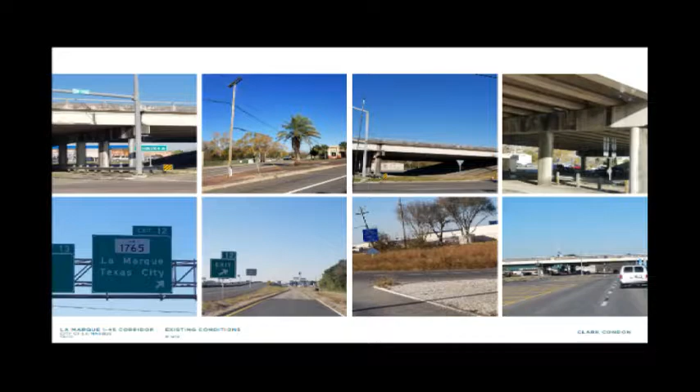Some of the big things you'll see here: the corridors down the middle, a lot of rail, a lot of major thoroughfares that cut through, and then parks all through the community that would be destinations for people. So that's our starting point.

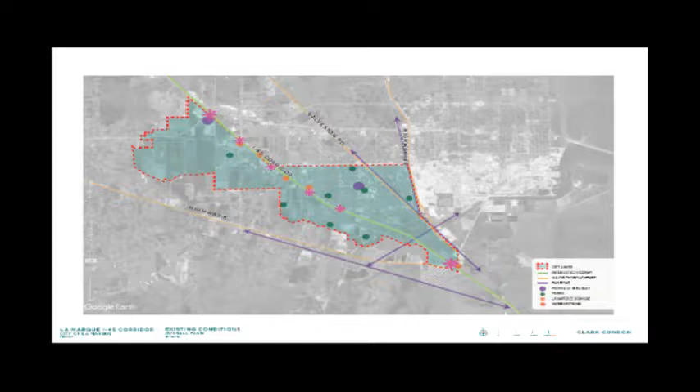But I think one of the big things Colleen and I have been talking about, that we want to really push TxDOT on, is that to the north of this, there's not much coming south on 45. How do we get them before we get into La Marque? They did a pretty good job coming north on 45, but not so much coming south. So hitting them before we get to the city limits is going to be key with the signage itself.

But other than that, they have increased the amount that has La Marque listed on them. Is number 8 and 9 still going to be like that, where it's got Texas City listed first? These are currently what they show on their schematic. They're only at 30%. We have not gotten an updated drawing set from them, so we'll be able to update this when we see that. Right now we're going based on what their schematic says, and this is what it says.

We had discussed before, any place where both cities are listed, putting La Marque first. It's a subliminal suggestion - but it's also alphabetical. That was the reasoning the individual gave that made that suggestion, and if that helps sway it, that would be good. Put us first.

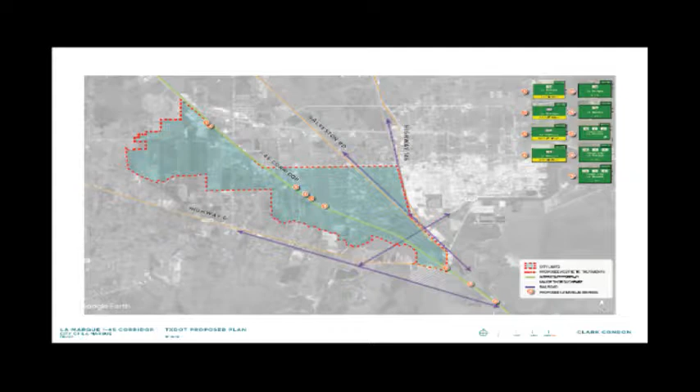So, one thing which you guys have seen it probably all over the place, but as you come down 45,

One thing we wanted to point out was they are improving the corridor. So you're going to go from those first images that we saw, which had no aesthetic to it at all, to what they call their green ribbon standard, or green ribbon corridors throughout the Houston region, and they're broken into 3 different areas.

Everything north, I think, of I-10 is what they call their vertical scheme, which is basically based on the piney woods. So everything's vertical. You see a lot of tree ID and things like that.

Everything to the west is based on the Katy Prairie, so it's a lot of horizontal schemes and horizontal things on the wall.

And then everything south of Beltway 8 especially is what they call their wave scheme. It's all based on the Gulf, it's all based on the water.

You've seen this being applied elsewhere as you go north on 45 already today. So they're applying the blue color to their outside beams, they're applying their wave on the columns and the walls and in the barriers. And then they're actually putting in concrete pavers throughout underneath the overpasses and things like that.

They are redoing a lot of the signals. I know one of the conversations we've had is we want to upgrade them to maybe a painted color or black or something like that, where they're just going to put in the standard gray.

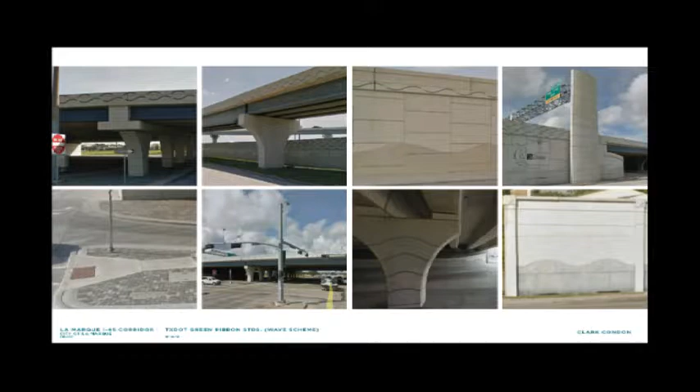So looking at some of the programming for you guys, which is an overlay to what TxDOT's already doing, we pulled some precedent imagery of things that have happened and things we've done, things we have in design currently for different areas. So there's things like doing illuminated street signs off those poles.

So when you pull them up to an intersection, it's pretty self-evident. It's not just a small blade sign. Enhanced planting along the corridors, enhanced signals with paint that are painted black or to go along with the schemes.

Similar here, looking at, you've seen what Webster's done, you can do the similar thing. They're going to be creating some detention ponds, so there's an opportunity there, especially playing off the whole water aspect of it, because we can over-excavate those and have a standing water aspect of it, create a pond with a fountain, so it kind of ties the whole water idea.

Branding and identity, so this is an intersection concept we've done for Texas City that they like and they're possibly going with, and again, it's more of the landscape.

So this is kind of the idea and the gamut of things that you can touch relative to either working with TxDOT or after TxDOT's done with their project.

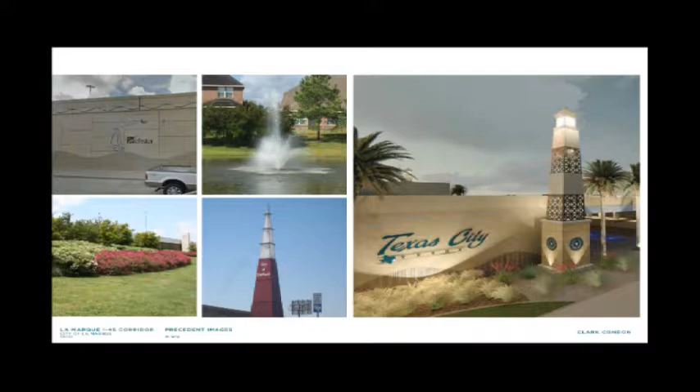So looking at, again, we're back to that same plan, looking at your corridor, one big thing we wanted to take away going for the proposed portion of this is those 6 intersections. We want to hit on those specifically, but then the 3 magenta stars that you see on there are big for what we want to talk about.

Those are probably your 3 big locations where we want to try to do maybe a large identity marker. We're not exactly sure, we don't have designs for that yet. We just have locations right now, but those are probably your first places where you want to grab people and say, hey, this is what we are, this is what we're about. And then we'll go into looking at each one of those intersections now.

So this is the first one at 1765. The trick with the first couple of these is that the city limits for La Marque and Texas City run straight down the middle of the highway, so that doesn't work very well when you're trying to brand an intersection, one side versus the other.

So what we'd think is to take the opportunity here, because Texas City's branding exercise stopped before this. They went to the flyover, trying to draw people into Texas City up there. So this becomes the first opportunity for you guys to make it your own.

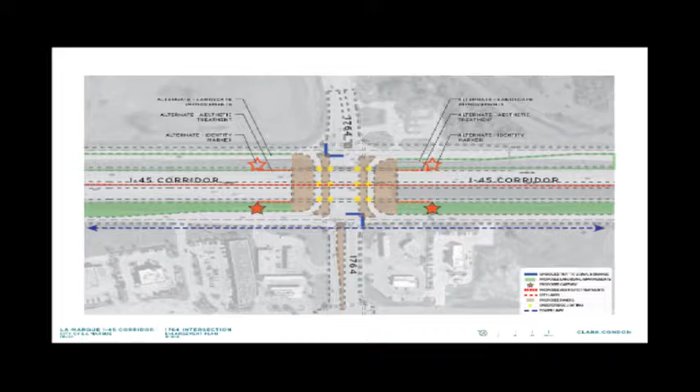The next one, Delany. You'll see this intersection again - we used it as a typical because it had a little bit of everything in it, so we show some enhanced renderings later on. But the key here is all the same stuff. You have the same issue with the city limits running down the middle of the road. Identity is the same, all the things are the same on this intersection, just a little bit different configuration.

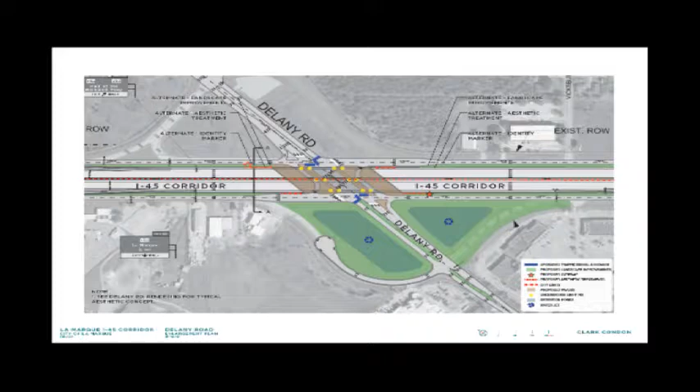But the idea here is the detention ponds - so if we have detention ponds, can we over-excavate those? Can we turn them into amenities for you that draw people in and show that you have enhancements throughout the corridor?

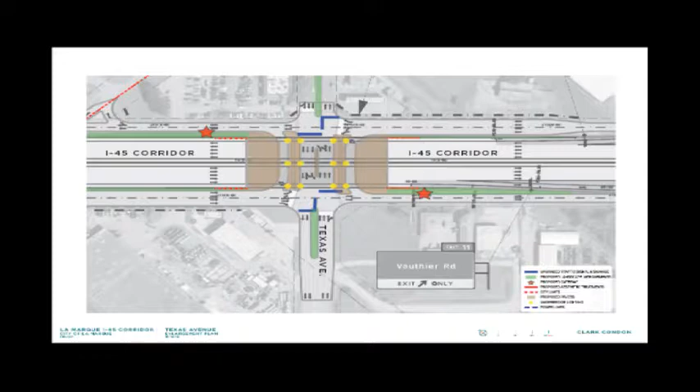Which one's this? Sorry, I'm blind, I need new glasses. I cannot see that far.

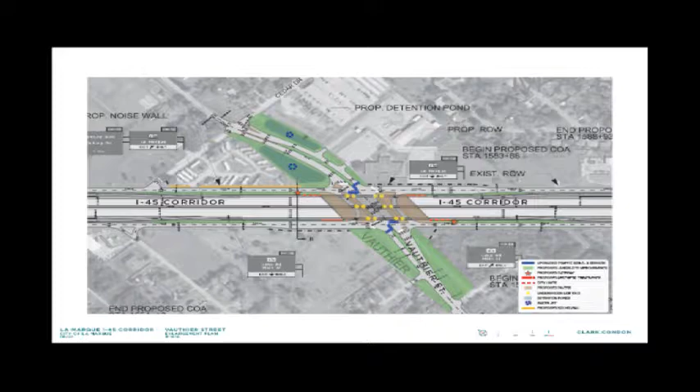This one is similar to Delany in the sense that it has all those same aspects with the detention on it. The key thing you pick up here is there's a portion where they start to have the sound wall - that's the orange line you see on the screen on the left. So when we get further into the details, you'll see how we have some options on how you can treat that as well to brand it and make it an identity feature for you. But everything else, for the most part, is the same aspect, same program, same items.

All right, this one is where Main and Lake come together. This is a very interesting intersection because they're bringing both of them together at the same time. One thing I'm sure you guys are not a fan of - they're using this in lieu of bringing Bayou through the corridor. So Bayou now is going to tee into the freeway, and they push you to Main to this intersection to go underneath.

And I think the reason why that is, if they had another overpass, they can't get up and down with their geometry that they want for the highway. So that's my assumption on this part.

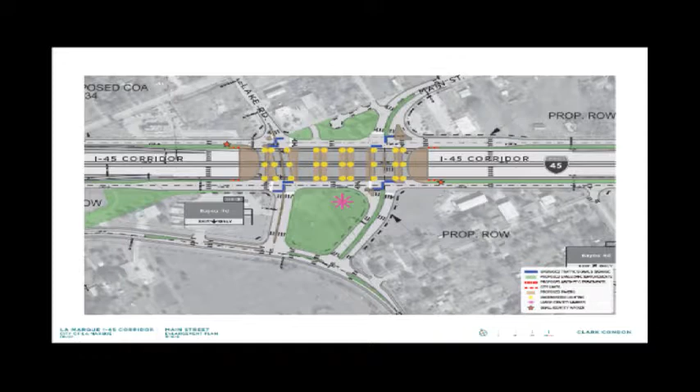But what this does open up for us is a bigger opportunity right in the center of the city to do that. That's what that pink star is, a place for us to do another large identity piece on that large green space right in the center of the city. So this could be one of your key intersections for branding and identity in the middle, especially with all the stuff you're going to have underneath there. It could be a large piece that you're going to remember if you're coming through here.

So we're going to keep zooming in, is pretty much what I would call it. If you think about starting in space at 30,000 feet and then coming in for a landing, this is what we're doing. So on the corridor aesthetics, we're looking at it in more detail.

Like I said, we picked Delany just because it had everything on it. And what you're looking at here is if you enhance those areas, what they could possibly be.

So the detention ponds that they have, we could go in and excavate the bottom of those and have a space where they have standing water and fountains in them. We're doing that in other places. It works.

They're floating fountain features, so they're mobile. They can be maintained pretty easily. I really like that feature.

Back on the ones I was showing you with Texas City talking about doing some, Pearland's doing them. They're doing that a lot, and it doesn't just look like a green divot in the ground. So it makes it a whole lot more of an amenity, especially when you landscape around them as well. Because you get off here and you turn right and it's just two big green holes in the ground. It's not really much of an amenity for you guys.

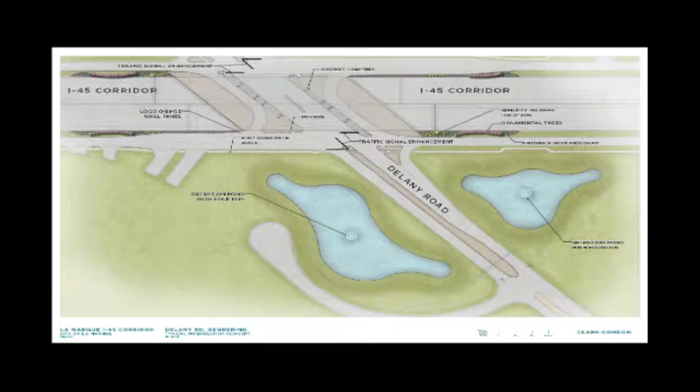You see this all over town, Sugar Land, any of those places. And what we're talking about here, and we'll talk about a little bit what the planting is, but that's where we're talking about more the high-end planting that you would have to be maintaining on a more regular basis.

Big picture-wise, when you start to zoom out, the spaces between intersections, really what we're talking about for you guys, because I know budget can always be an issue, because some of this, when you start doing over and above what TxDOT's already doing, they're going to talk about maintenance agreements, they're going to talk about what you're doing over and above what they're already maintaining.

They're going to maintain it like you see it out there today, so if you want it maintained to a certain level to obviously enhance for your community, you're going to have to take some responsibility, and that's what they're going to require of you guys.

But what we're suggesting is using some of their basic stuff, which is their planting, which you see all over the place, is that mass planting, where they go in and put big swaths of different plant material together. Kind of reforesting is what they really call it.

And what we're talking about between intersections, where we don't have the enhanced planting, is creating pockets on a regular basis so it continues the landscape theme throughout the corridor, but base it on something that's standard for TxDOT, so it'd be less of an issue for them, where we're just going to work with them on what the plant material is in it.

Are there parameters on what kind of plants they will allow?

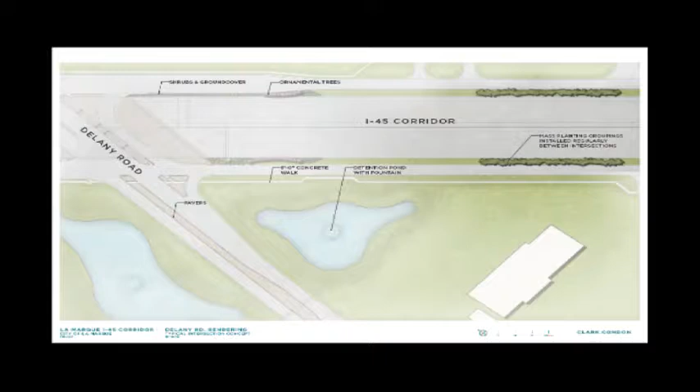There are very few that they won't allow if you're maintaining it. They have their standards that they like to do, but what we would want to do is try to gear this towards the region that you guys are in and something that works for you guys.

As an example, we pulled out one of those enhanced planting areas, and the theme we would want to go with you guys, because I've heard a couple comments about staying away from the whole palm tree kind of look and feel, is playing off the other aspect you have on the coast, which is like the coastal prairie or the grasslands along the coast.

So looking at a grass mix with pulling in some plant material that you have along water, like irises and things like that, so you get flowering, repetitive flowering. This is not like seasonal color, not something you're changing out every 3 months. It's something that's going to give you different textures and colors throughout the year, but it ties to the coast. It's not pulling in palms, but it's still playing off that coastal prairie feel. And then pulling in some crepe myrtles instead of palms to give you some vertical, but also a lot of impact with color.

And that shows you what could happen right at those intersections, giving you that high impact, high color aspect.

Then down at the bottom, when we get to those mass planting areas, typically what we try to do is stick with things that are regional, things that can maintain themselves. They're not high maintenance, and TxDOT's going to like that, because typically what they do, if you go that route with them, is install irrigation on those things to get them established, and after a year or so they shut it off. So if we could do the same thing but get it to the scheme that fits your community, then you can even shut it off, and maybe only have to maintain irrigation on the intersections.

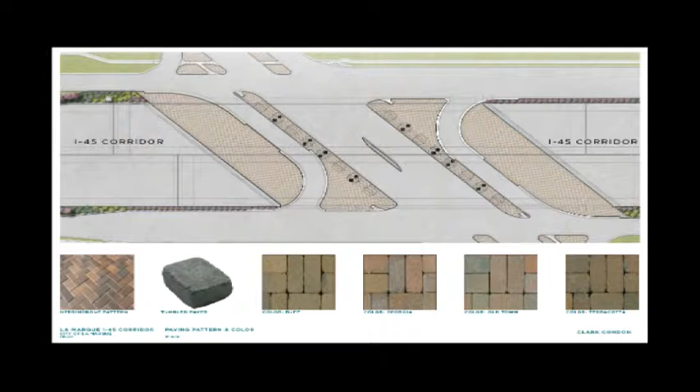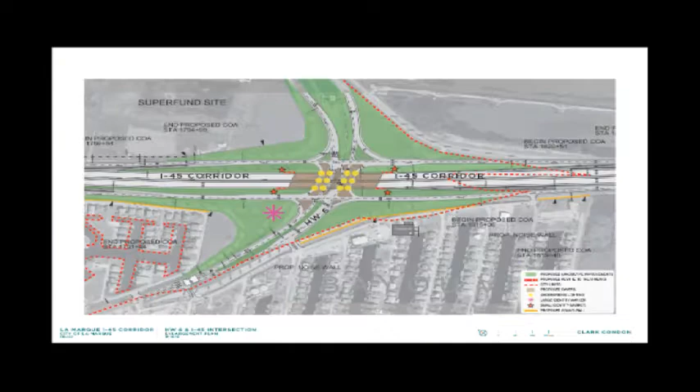Our seal is not going to show up well on the freeway. I agree, I wouldn't want it to be on the freeway. I think it would look - and it's too much detail. I for one would be open to simplifying our logo. Although I really dig the one we have, it doesn't work well with what we're doing here, and if we're trying to identify La Marque, I think less is more.

The conversation that Colleen and I have had is there's a difference between print graphics and environmental graphics. Environmental graphics, usually the simpler the better, because it makes it bolder. When you start getting very intricate and talk about 55 mile an hour and how big those things have to be to read them, that's the trick. So obviously if you do those letters at 2.5 feet tall, that's pretty straightforward and clean - not much complication, and it's going to read. That's the benefit of things like this, because these can be huge - 3-foot letters on this version, and it's not that complicated.

I do like this concept of doing a backlit cutout version, because it's different, and it would make you guys stand out since I don't know that anybody's done it. There will have to be some conversation with TxDOT, because it's never been done, and getting TxDOT to do stuff they've never done is always fun - but that doesn't mean it can't be done. So it's a question of being simple. I think we can make this work and make it look good, it's just going to be very intricate.

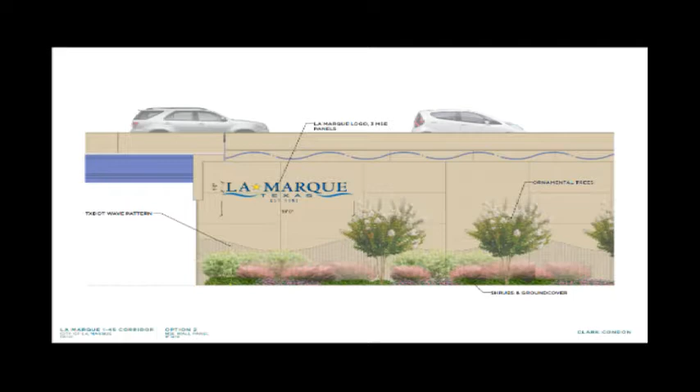And it would still - did I see a version in here where you had Texas symbols on the, I don't know if you're calling those towers, but - yeah, you're talking about this version, the yellow star? Yeah, but maybe with color. I'm just spitballing. See how much harder this is to read? Our logo is extremely challenging for marketing.

So we kind of tried to go the other route, which is just positive, negative, which you do have a black and white version of it. But again, it's tough when you're going to go from a detailed graphic like that to environmental graphics and make it read. Colleen, what's your favorite, star or no star?

I like the Lone Star. It tells you you're in Texas, and it makes us stand out a little bit more. Everybody loves the Lone Star, especially if there's a circle around it, like that. The only thing, Alex brought up a great point, that it almost makes you wonder if it's like LA, like Louisiana. I know we're in Texas, but it almost separates it a little bit. But I like it because La Marque is two words, and it will help solidify that La Marque is spelled with a space between.

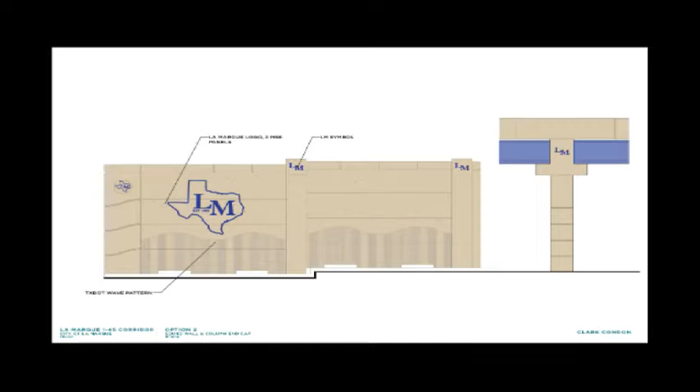Mayor, the logos for the school, when they've put just La Marque, don't they use the same staggered style? Yes, that's what they've got. I like the idea of maybe incorporating that LM in certain areas, and the shape of Texas or a star in other places.

We did two versions of this. This one has them disconnected, with 'established' underneath the L—if you're just doing the LM, you may not need the 'established' at all. This won't work for us since it doesn't say La Marque. On the MSE panels, it needs to say the word La Marque somewhere. So you're really just talking about the LM, and potentially the LM with Texas around it.

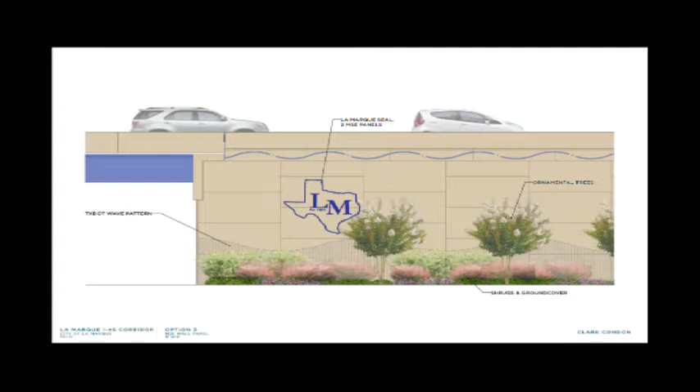The only difference with this one is the tower, where we interlock the L and the M, kind of like some of the high schools have done. I like that idea of the LM within the shape of Texas on the tower portions, taking advantage of the freeway visibility with our La Marque branding. And I like the star—and I like it without the star too.

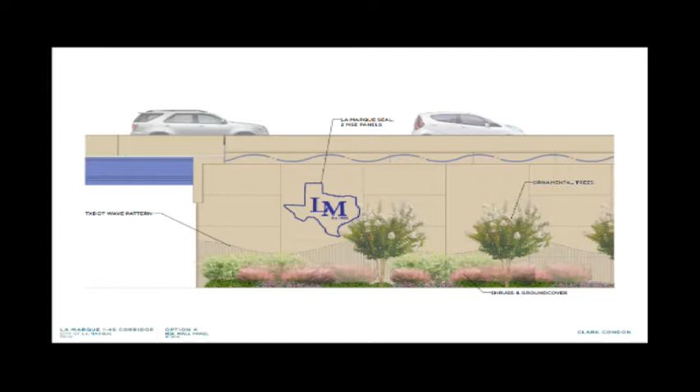Star is kind of cool because it gives an additional color, and those are our colors. I like it.

I'd have to go back to the beginning of this presentation, but the examples I showed of sound walls already done on TxDOT, some have a star on them, but they aren't painted, just a relief of a star. We can go back and look at that before we're done, but you could do it that way if you didn't want to paint it.

Out of curiosity, would they allow, so what are we calling them when they're at the top? Are you talking about the column cap on the right or the walls? Both of them? Okay, both of them, for their example, two different things, what are the names?

The one on the right would probably have to be painted on because it's the end of a structural member of the highway. They're not gonna probably let us do a form liner kind of thing on those. The column caps on those columns could have more flexibility in what you can do. Those could be imprinted and painted.

Is it possible to do, do they ever allow, for the length of the wall between two intersections, it's all stars, and then under this one on the right that's the LM, could it be different images? Yes, you can kind of do whatever you want.

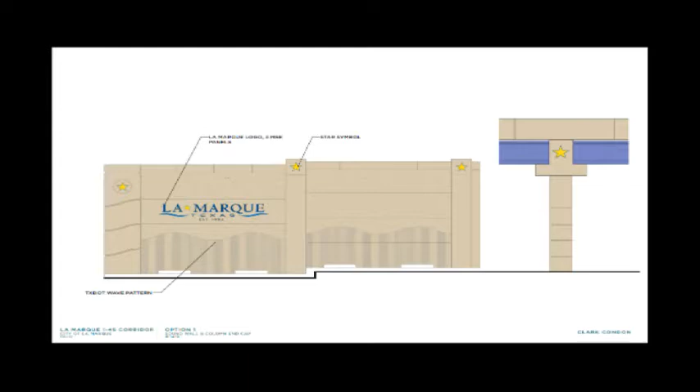And then I have one more question about some of the landscaping. Okay, let me back up. First of all, I'm extremely excited to see such an incorporation of native landscaping. That gives me all kinds of happiness.

I just wanted to know if we wanted to incorporate more native landscaping, trees, grasses and shrubs, as a way to set us apart a little more than the landscaping for all the other municipalities around us, like crepe myrtles and the same things you see over and over again. They're all really beautiful and I don't have any problem with them, but thinking of how we could set ourselves further apart through our landscaping. What's the cost relationship there? How much leeway do we have, and how much lead time do we need to provide?

None, because this is probably the piece you have the most time on. With landscape, all we have to do is tell them we want to work with TxDOT on landscape. We have a very good relationship with Dana, the landscape architect for TxDOT. Basically, they have a road budget doing most of this work, then they set aside typically 1% of the construction budget of the highway for landscape. So whatever 1% of the construction is of this project goes to landscape, that would be Dana's budget to do this work.

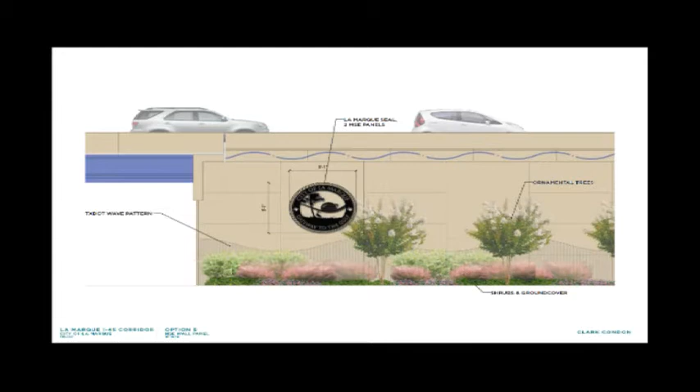I think we need to continue this conversation as the weeks and months go by, because we have another presentation, and it's 10 after. If you wouldn't mind, coordinate with Colleen on all these different ideas, and then she can come to us individually, or we can discuss it at our meetings coming up monthly.

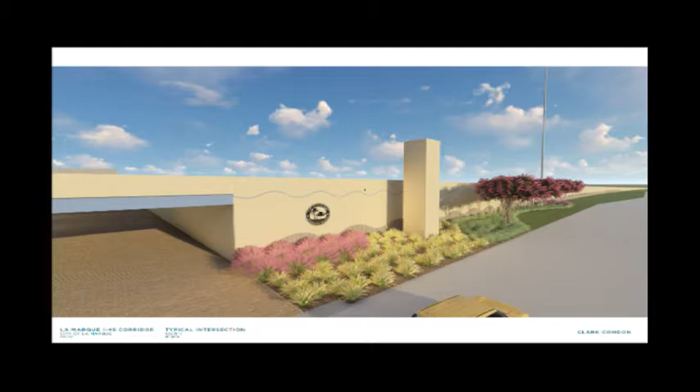And thank you. So, the problem - I've already looked at the numbers in the back, by the way. They're pretty big, I know. Yeah, I don't think we want to ruin our appetite looking at those this evening.

Are any of those numbers payable by TxDOT? That's why I'm asking, how do we differentiate what we'd be looking at out of this? For example, the landscape numbers are pretty big, but remember a big chunk of that, if not all of it, is going to come from TxDOT. We're just maintaining - you have to agree to maintain it, unless you decide to do a whole lot of extra stuff, or agree to let them do whatever they want and let them maintain it however they want.

How cost-effective for us are the fountains in the detention ponds? Over-excavating the ponds is usually a big number because it's a big area. If you look at those budgets, there's probably $500,000 or $600,000 per series of ponds, so that's a big number up front. After that it's pretty minimal - you have a floating fountain that's about 60 grand a piece, and then you're just maintaining the water level. So there's a little bit of maintenance with it, but it's a lot more upfront cost because you're paying for extra excavation.

Now when they're bidding it, that number could come way down, because if they're already digging a hole, you're probably going to get better numbers than you think when you're bidding a big project - they're bidding a $200-300 million project.

So basically, we pick what we want, and if TxDOT's already doing it, we just pay the difference. Gotcha - so if they're already doing that detention pond and we want it deeper, we just pay for the deeper part. Yeah, kind of like the next discussion we're getting ready to have about the infrastructure. And the key is too, just because they price it doesn't mean you have to do it. You could tell them you're not paying for it, and then they'll do what they were already planning on doing.